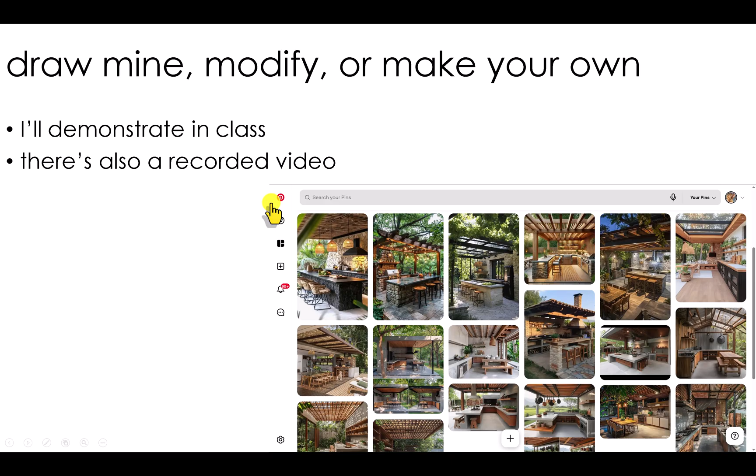There's a link to a Pinterest board here, and you can do your own internet searching. But the main features are some kind of outdoor kitchen, a trellis, all pretty much up against some kind of wall, existing wall of a house or otherwise. Of course, there's a recorded video, which is this.

Initially, right off the bat, one of the first things you'll want to think about is: is this going to be a fully photorealistically rendered model, or are you going to be trying to create a more artistic version? Because your precision level in the model will vary quite a bit.

High resolution photorealistic presentations, especially if there's some sort of walkthrough or VR piece, that's a very high bar to make.

However, if you're creating something more artistic like these two images here, black and white in particular takes out the color information. It's amazing how different an image can appear when you provide just black and white imagery and then perhaps some materials or suggestions for materials.

And same with an artistic sort of watercolor image. It's amazing how it suggests without getting too hung up on the detail.

So creating a new project begins by opening Revit. And one thing that I want to encourage people to do is use the default template. Other templates are kind of bloated. And what I mean by that is if you take a look at the new project menu, it doesn't usually have default in there.

But if you click browse, you can see all the templates, and there actually are quite a few, including metric, electrical, other sorts of things that you may need. But default is the one that we want. Let's use that and click OK.

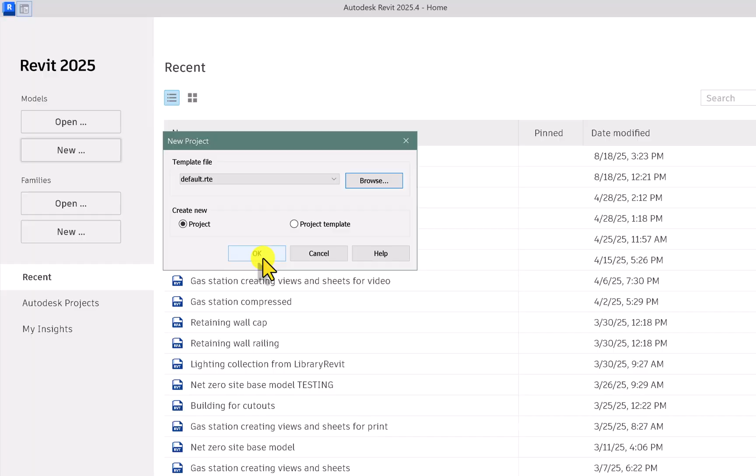That brings up the basic menu. And now we have to begin building stuff.

Now the question is, what's the best strategy for putting together a model like this? And it helps to understand how Revit models are put together and what each type of family in Revit is best at doing. And the most basic things in Revit are made of what are called system families.

These are walls, stairs, balusters, symbols, that sort of stuff. These are very nice, they're really efficient. However, they only have built-in options and they're difficult to customize. And typically they are placed on an active work plane.

So you have to understand that there are work planes, which are basically reference planes in Revit. However, each view has a default work plane. So if you're in floor plan view, the work plane is the floor plan level reference plane. And if you're, say, in elevation or reflected ceiling plan, there are work planes associated with those levels as well. So everything you draw will go into those planes.

And some objects only go on certain types of reference planes. So, for example, you can't put a wall sticking out from another wall. It has to go on a floor level reference plane.

So, anyway, those objects actually are nice because you can copy them to multiple levels. So I can draw a bunch of walls on the first floor and copy and paste them all onto other levels. And the biggest thing is that these are all parametric. You should understand the difference between instance parameters and type parameters.

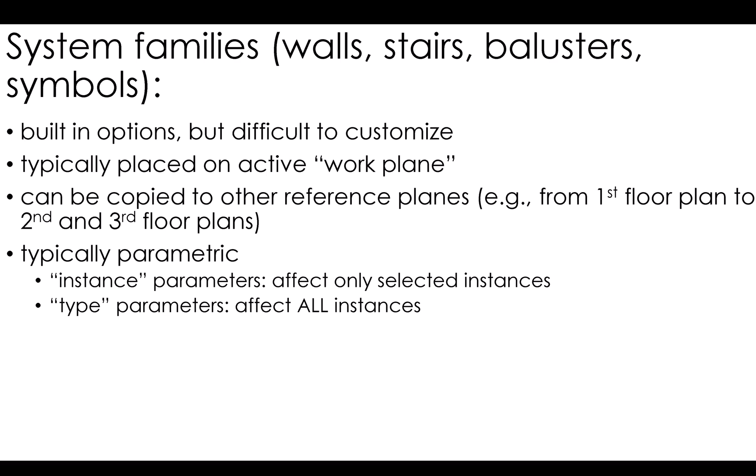Whereas instance parameters, like in a wall, a typical thing would be a dimension. How high is it? Where does it stop? And where does it start? So how high does it start on the ground level, or does it start on some other level?

So the next type of family are standalone components. These are probably the most typical sorts of objects you see in your models: doors and windows, all sorts of lighting and other furnishings. And these are great.

They are defined by the type of family, so when you're creating a new one, you have to choose in advance what it is. If it's, say, a ceiling mounted light fixture, it's going to have a light source in it, and it's going to be, you guessed it, ceiling mounted. So you do have to think through what the object is going to be.

These are drawn as separate files, so you can share them. People can steal them from your models, and they can also email them to you. You can go on the internet and find some.

These have special massing types particular to these sorts of families: extrusions, blends, sweeps, swept blends, and revolves. These are all rectilinear types of things, typical of most of the stuff we have in our built environment. And these can be solid objects or voids, which can cut other objects.

Sometimes you'll find nested components. An example is a door family might have a knob family inserted into it. So to edit the knob, you actually have to edit the door and then edit the knob itself.

Finally, most components will have parameters, and they are particular to the family. Things like materials are very common, and these can be instance or type parameters. It's kind of up to you.

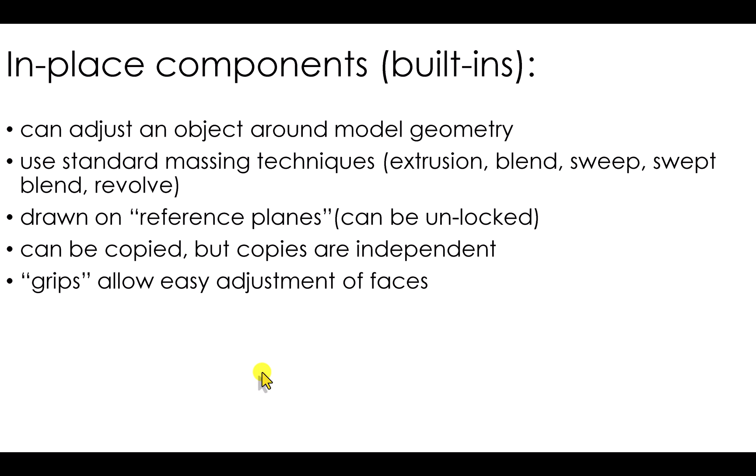So these are great for one-off items, things like a bookcase that has to fit into an unusual spot, or something that has to go around a column. Like other components, they use the standard massing techniques, and they're drawn on reference planes. Once they're drawn, they have handy-dandy grips, which are great for adjusting around elements in your model. So they're a little more flexible.

Are you looking for more flexibility? Well, in-place masses are actually great for non-rectilinear shapes. I'm thinking shades for lamps, something like that. So they don't have any of these standard massing tools.

Instead, you draw a profile on whatever surface you have chosen as your work plane, and then you can extrude that, and you can edit points and lines and planes on that object to create even more complex shapes, and they can be cut with voids, just like the other objects. So really handy for unusual shapes.

If you're not having enough unusual shapes, in particular if you're creating a whole new building, conceptual masses are the way to go. These are very efficient for modeling, say, a multi-story building that has an unusual shape. And the reason is that surfaces in these conceptual masses can be easily converted into things like walls, roofs. Even multi-level buildings can have all the floors created that take the shape of that multi-level building.

Pretty powerful stuff. And there's other elements like adaptive components that can create structural grids or something like that. Really great, but also quite complicated.

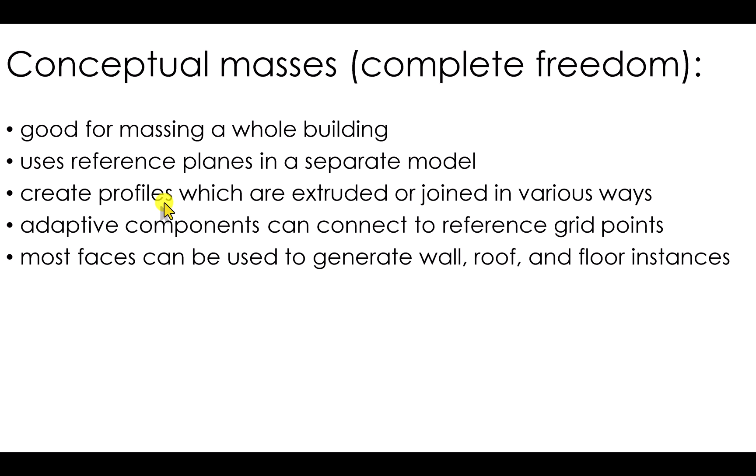Now, finally, the one type of object that Revit doesn't create that you often will use are imported objects. SketchUp or DWG, AutoCAD file formats, is in particular a great translation file format that you get objects made in Blender or other 3D modelers that go through that file format. Revit handles those very nicely, and boy, that saves a lot of time. That 3D warehouse is super handy for objects.

Finally, materials and lighting. Now, we can do all that in Revit. However, for optimal results, we use a rendering engine. And in particular, if you have to deal with landscape, landforms, or trees and plants, there are rendering programs. We will be using Lumion, and that is where we will create materials and lighting.

Now, you still need to create surfaces that have unique materials on them in Revit. This may involve creating split faces on surfaces, or just creating separate objects with different materials. Because the default material in Lumion, if anything is painted, that default material will change. So things like balusters, you want control of those objects.

Well, when you start a new project, the best thing to do is to not jump into Revit, but to think about first what you're going to do.

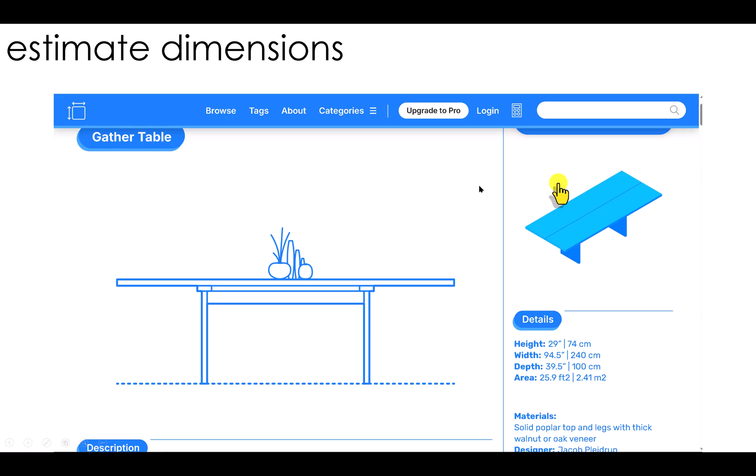The other thing that you'll want to do is really get a sense of what the dimension of things are. In fact, there's a website called dimensions.com, which is like a great name. And it has a lot of typical objects that you can go and look up. I looked up a gather table kind of thing, just to get a sense of how big that is. That's really helpful to check these things before heading into the model, rather than throw something in and see what happens. Now, sometimes you have to do that.

I would also strongly recommend making some kind of sketch. I just kind of sketched out what I thought I was seeing in this model, that there's probably some walls of an existing building. Looked like they were having those walls around the counter area. There was a table. There were some changes in materials, some planting. Having that allows me to roughly estimate how big this space is, again, based on dimensions.com's measurements. And that gives me a place to start with my modeling.

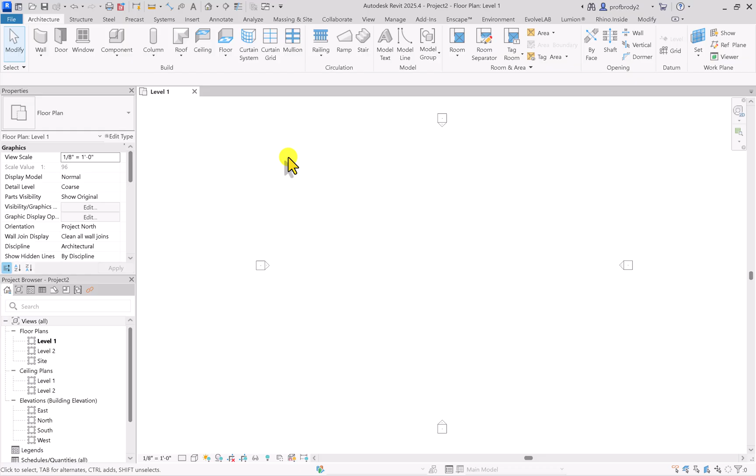So let's get to it. Let's get modeling. So the place to start is on the ground. Let's make a site. We can absolutely use Revit's TopoSolid features here on the massing site. These are great and very powerful tools for creating three-dimensional slopes. However, our site, if you take a look at the image, is really pretty flat.

So if we take a look here down at the ground, it looks like it's got some wood paving and some stones. So we don't really need all that complex. I'm just going to use a floor. And if you remember, floors are a sketched object. You can just draw them. I would draw them in the middle of these exterior elevation symbols. You don't have to, but it's handy.

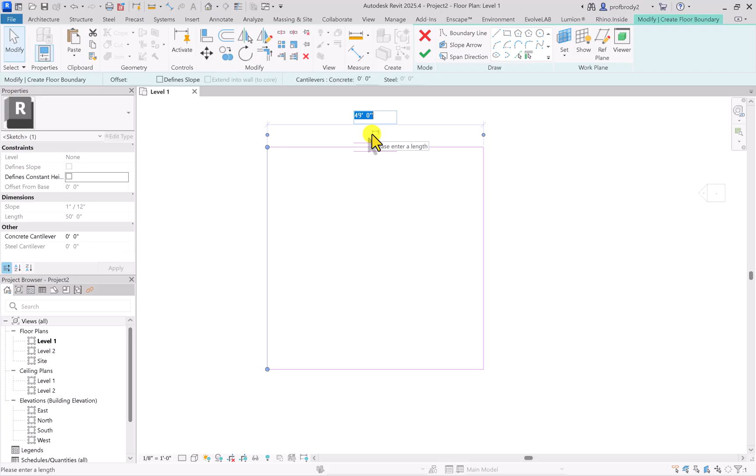Wow, that was hard, right? And here's my floor. It's very exciting to look at. It's a generic floor. Now, if I was going to be using this as an actual site where I would be cutting sections through it and all that, I might give some more thought, maybe make it the thickness of some paving and put a topo solid underneath it. But for us, we're just going for a rendering at this point. So a generic 12-inch floor is fine.

Now, if you remember my plan sketch, there were a couple of flooring materials. There's a main area that has some gravel on it, and then there's a couple of walkways. And so let's draw those in. But we don't need to draw a separate object. All we need to do is split the surface of this floor.

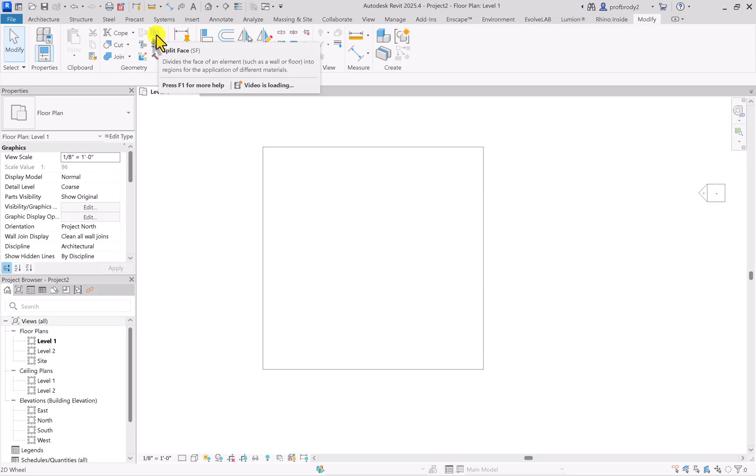To do that, you basically just go to the Modify tab that's up here on the ribbon, and you'll see that there is the split face tool. If you select the floor, by the way, the modify ribbon comes up all on its own.

Invariably, what happens when you get a couple of minutes into your project is you get this save the project button. Absolutely do that. Don't wait until the end of the day, because if your computer crashes, if something goes wrong, you will have lost everything.

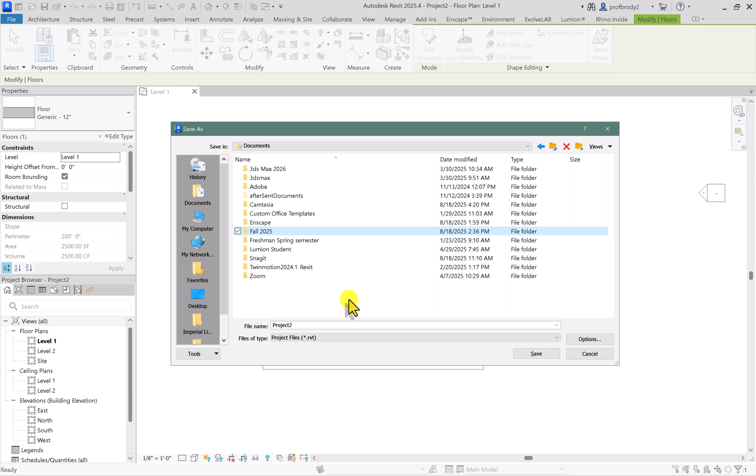In this case, you can save the project and it will save it periodically. You can even set reminders to save the backup, which it will save onto your file and keep updated for you. I cannot emphasize enough that you have to save this where it will get backed up. So I have a folder for this semester, for this class, and even for this project, and save it into there, give it a name that you'll remember so you can be assured you don't lose your data. When you do this, every time you save it, if it's something like Dropbox or similar, it will automatically save it.

Okay, so we were splitting faces. Let's click on the split face tool, click on the edge of the floor, and now we can just sketch in the lines of the floor separation. I'm going to try to draw it roughly in the middle, and I think I figured out that it's roughly 16 feet.

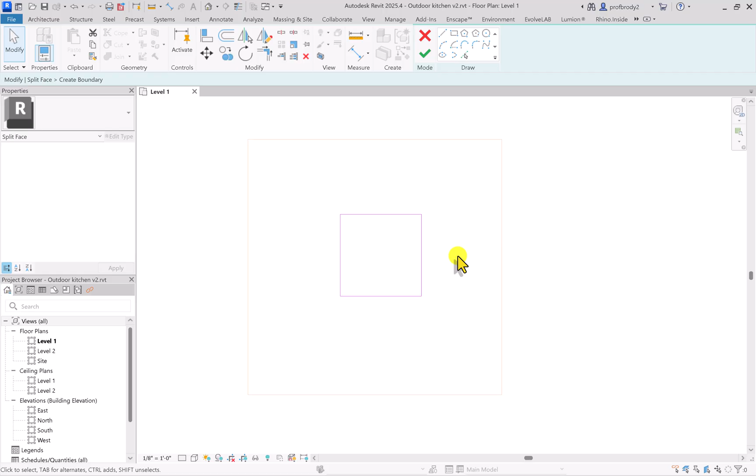You can nudge that puppy around just to select it and move it with your cursor, or you can hit the left and right arrows and up and down arrows to move it around. It doesn't have to be in the middle, we're basically using this as a reference site, so not a big deal. If I remember, there was a walkway off to one side and a walkway off to the other side. So right now we have this center section and this outer section.

To create these other pieces, go back into split face, again click on the edge. You'll see these light orange lines now appearing. When you draw them, I recommend drawing them one at a time. I have one that I want to go all the way to the end of my face. All I have to do is draw this one line. I don't want to overlap any lines, and I do want to make sure that it meets this outside wall.

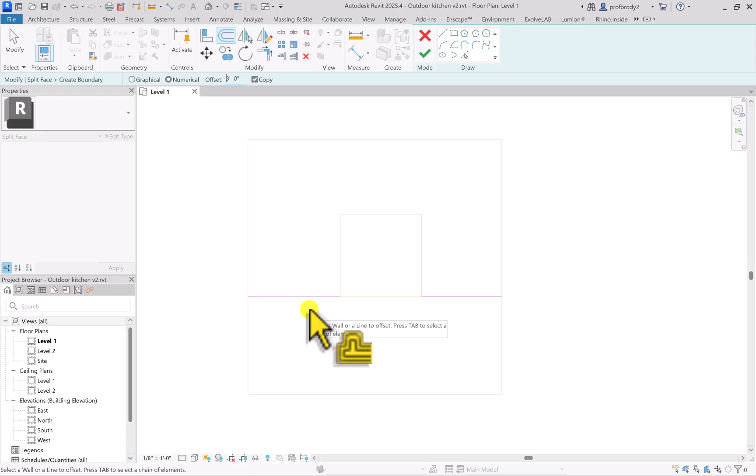If I want it to be, say, 3 feet wide, I can use an offset value here. I can just use the offset tool. And now when I draw that line, it's exactly 3 feet apart, which seems fine for a garden path.

One thing to be careful of: if I have more than one line - I want another path going this way, but I believe the direction of the wood goes the opposite direction from the path. So I'm going to do that as a separate split face. I'll clear this one by clicking check. Now I have 2 areas, and I'll draw that one last split face.

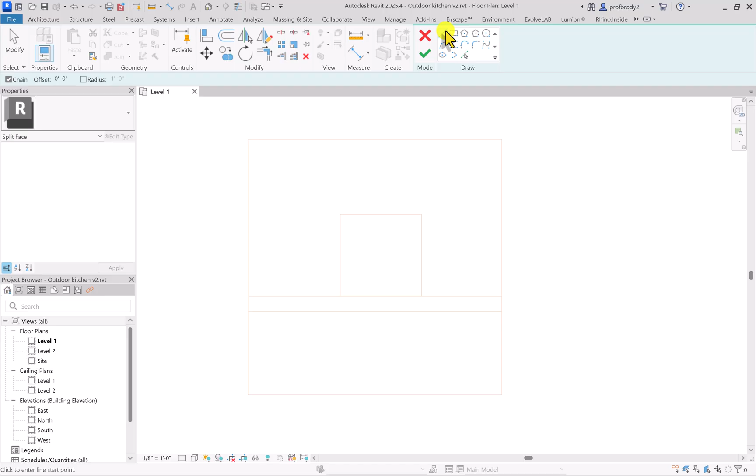Don't try to draw them all at once, because Revit really hates that. Or don't try to draw them as a rectangle - again, these overlapping lines will throw an error message. So I'll just delete that and draw those as a single line here. And there you have the rough outline of our site.

So I'm going to want to create something, even if it's just a placeholder material in the model. Let's call up the materials library. Shift M should bring it up, or you can browse to the Manage tab, but Shift M seems to do the trick pretty well. In the materials library, remember you can view these things in different ways, by name, get a thumbnail, you can even make a nice big thumbnail. So I've created some for the gravel and the fieldstone.

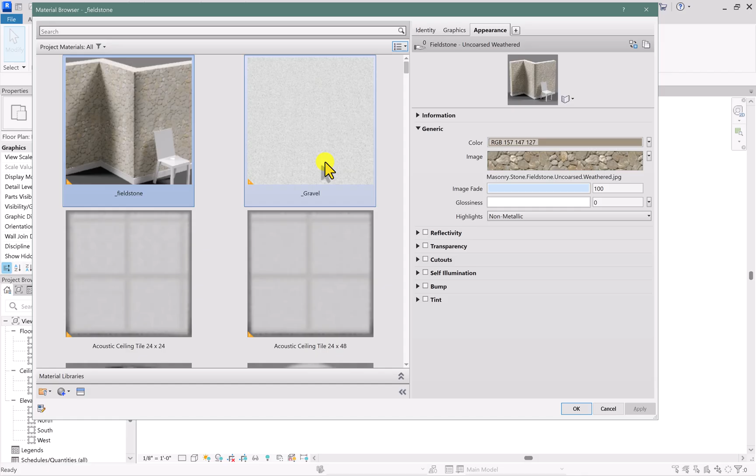Let's create one for the ground material for the flooring, and I'll choose create new material. As a reminder, name these something you'll remember what they are - I can't tell you how many people have like 12 default materials in their project. I use an underscore, but you can use your initials, anything to just help you remember.

I'll just call it decking, and you can choose the class. This is handy later on, but most of us are usually in a rush, so let's choose wood just to be efficient.

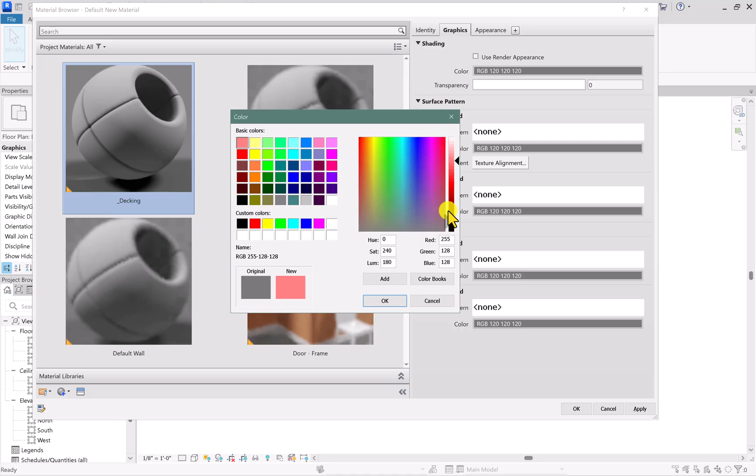Usually I use the render appearance, which makes the shaded view about the same as whatever the render appearance is. But in this case, I'm using a different appearance because I have two very similar materials that are the same except one is rotated 90 degrees from the other. So in the shaded view I want to make sure I've got them painted right. I'll click OK and use this color instead of the appearance.

Then in the render appearance, I'll use the render library. You can stretch this out so we can see the image a little better, which is helpful if your eyes are bad or you're using a tiny laptop. Then we can replace the asset, which is the base material used for this material, the base image. Be sure to use the Autodesk Materials Appearance Library.

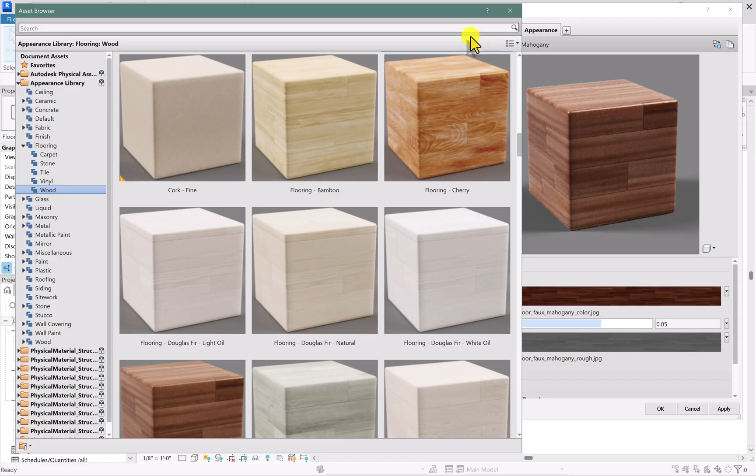I'm under the appearance library, under flooring, under wood. You could also type in the search. I'm just going to use this mahogany. I'll click apply this asset, close this library. Now we have this lovely material. I hit apply and OK.

I should be able to apply all of these materials by just typing in PT for paint. And the decking, which I believe is going horizontal, should go here. Now if I make this shaded view, I'll see that bright color I mentioned before.

I'll use the gravel for this gravel area. I believe there's some grass in here, so I'll paint pretty much everything else grass. Then this last little piece, I need a new material.

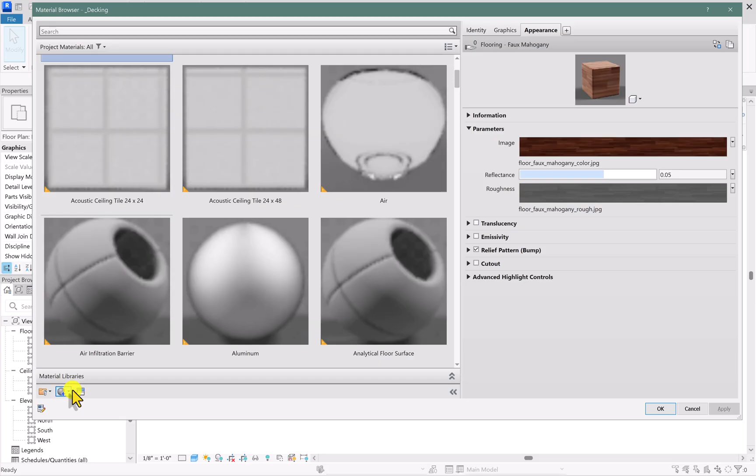Let's go back to our materials library and call up that decking material, and I'm going to duplicate that material and the assets. This is very important, because if you look up here, the duplicate material, I'll just call this decking at 90 degrees, or something like that.

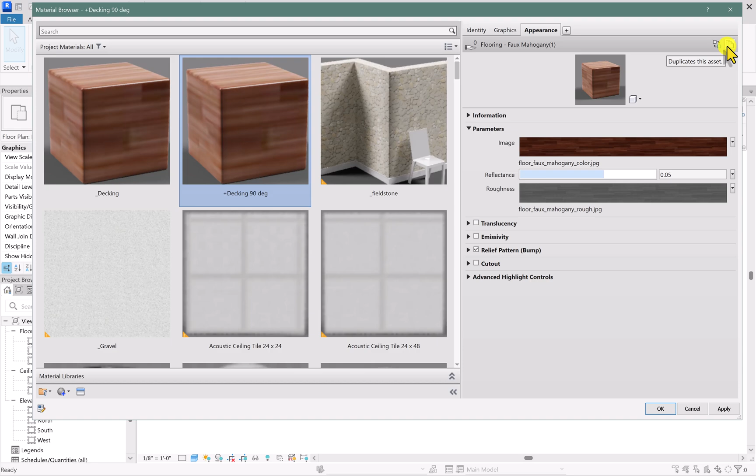I'm going to make the graphics something different, maybe green, so it's easy to recognize. You see the image here is mahogany, but it's mahogany number 1. If I were to go and change it and I didn't duplicate the assets, these would both change. So you have to make sure to duplicate the assets, and if you forget, there's a duplicate asset button to fix this very problem.

Now to rotate the image, just click on the image here. You'll bring up the image editor, and you can come in and type in some value for the rotation. Let's try 90 degrees since that's the value we want, and apply. You should see in the preview that the flooring is going the opposite way. Click OK. And now when I paint, I should have flooring that's going the opposite way.

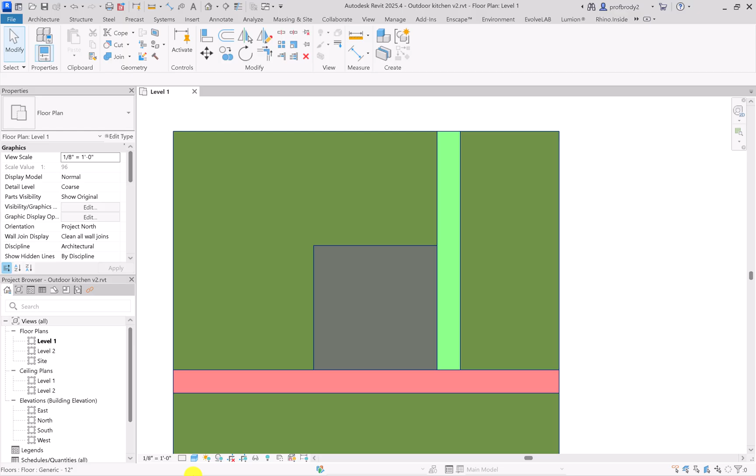There we go. See how easy it is to tell in this shaded view. If I hadn't changed those shaded colors, it would be a little tricky. Of course, I can always go down here to realistic view and give it a minute, and now I'll see how the materials are showing up.

But I don't like to run Revit using the realistic materials all the time, and the reason is it just slows down your computer. You may or may not be able to hear, but my fan is going bananas and the computer is getting really hot. So by all means, stick to shaded view in Revit. This is particularly true if you happen to have Revit and Lumion open at the same time—you want to be careful with your system resources.

Okay, let's add some walls. Like I mentioned, you can basically make your way down the toolbar here and create your project. Walls are one of the fundamental elements. One of the big things you'll want to do is choose walls based on the rough sense of how things are put together.

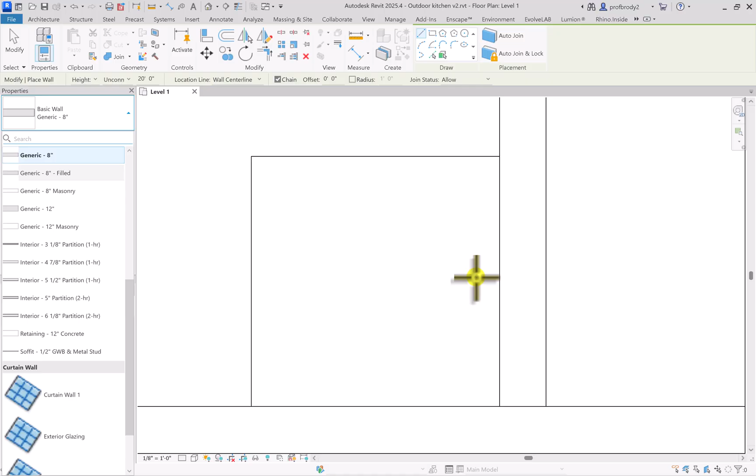For example, I believe there's a house back in here, and we're going to make our trellis supported on 4 pillars, and I think I'll use walls for those too. A generic 6-inch wall is probably fine for the house. When you create a wall, I'll just create it using lines here—you'll see it creates very nice graphics. I'm not going to draw the whole house because I don't really need to do that, and I can use the align tool.

I'll select the wall and hit align, then align this wall with that reference point. I could even lock it into position. But you do have to be careful - if you lock it and then start changing your mind, watch what happens to the floor. The floor outline actually moves as well. So we don't want to do that.

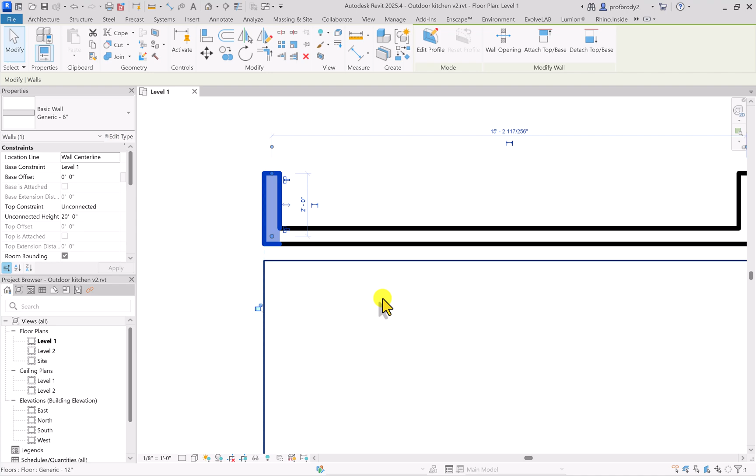I'm going to click that and unlock it. And then for this one, again, I'll use the same align technique - the aligner and the align. Maybe I'll leave a little bit of space between the two, just so that they're structurally independent.

Then for the walls that I'm going to use as the posts, I could draw these as in-place components or whatever, but walls are awfully simple for doing this. I'll select the wall tool, but I want a masonry wall, and I want it pretty thick, maybe 16 inches. Well, we don't have one, so I'm going to take this generic one and make my own.

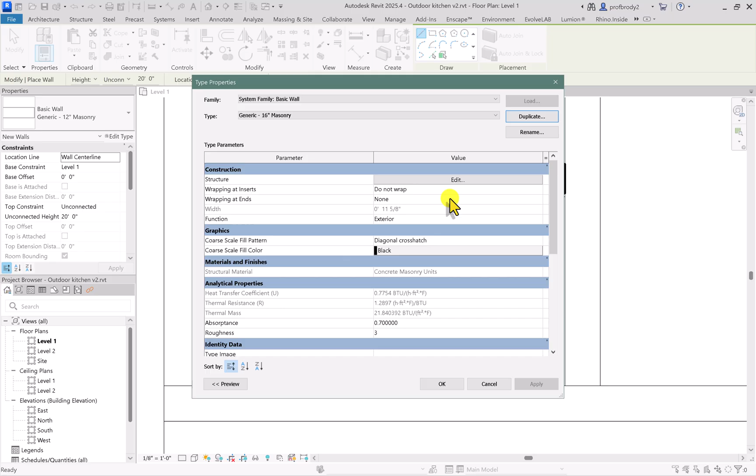So choose Edit Type. Here are the type parameters in this family, this 12-inch masonry one. I'm going to duplicate this and call it 16-inch masonry, because that's how big I want it to be. Now, changing the name does not change the material or the dimension. For that, you have to go to the Structure menu, and in here it shows the materials and the dimension. It's a funny dimension because that's the size of a concrete masonry unit.

I can just select it and type 16 inches, because this is a stone wall, so it's a little more freeform.

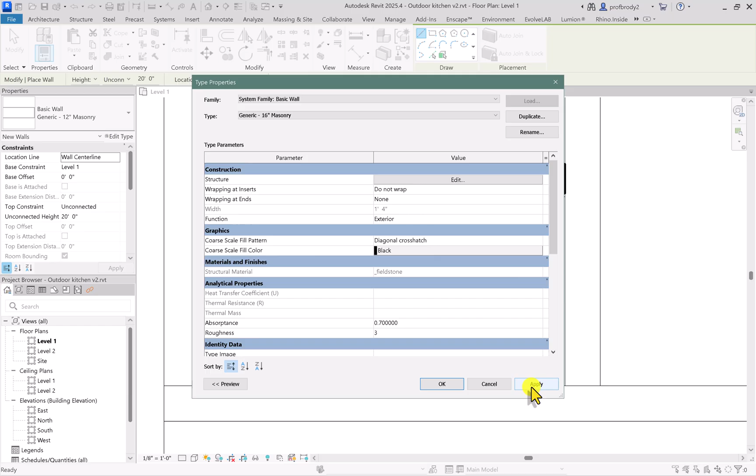And then I can select the material just by clicking in the box. When you click in the box, this little three dot menu shows up, and then your full materials menu shows up. In fact, you can even create new materials in this menu, which is actually kind of handy. But I'm just going to double click on that material to apply it and hit OK, then OK, apply, and OK one more time. Don't forget to hit it.

And then now I finally can just go and draw my wall. I'm going to start it a little bit away because I don't really know where it's going to land. I'll come down here and let's say we'll draw it about 2 feet. And if you're not sure how long it is, you can just select it and type in 2 feet 0, and it should shorten right up.

And then you can move it into position by clicking and dragging, or you can use the align tool. Just be careful again with that align tool - sometimes it moves the wrong line.

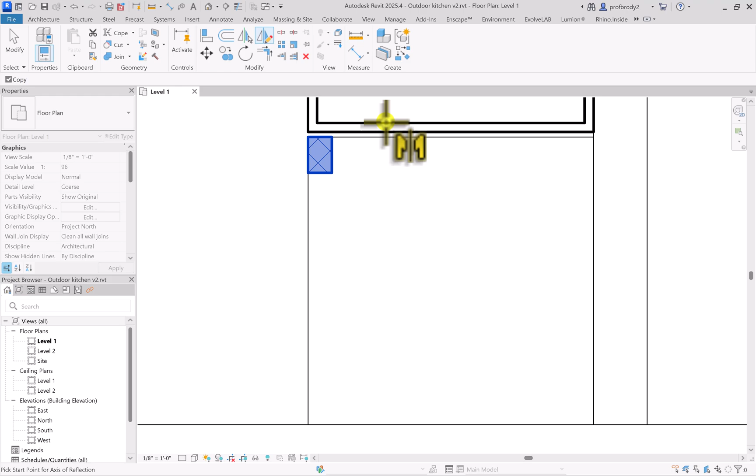And then to get the 4 posts, I could do this any number of ways, but I think I'm going to just use mirror to get them, just to make sure they're exactly the same. So choose mirror, draw axis, make sure that you have the copy button selected. This is just a real quick way - oops, did I get it? I guess I did, to make that copy.

Then using this modify tool, I can select these objects. You just have to remember to hold down Control to get both of those columns. And I'll use the same mirror trick here - it's all smoke and mirrors. And now I have myself my 4 posts.

So let's take a look at that guy in 3D. 3D, if you remember, is the default 3D view, this little house up at the top. And there you see it - I have a lovely little frame for my trellis.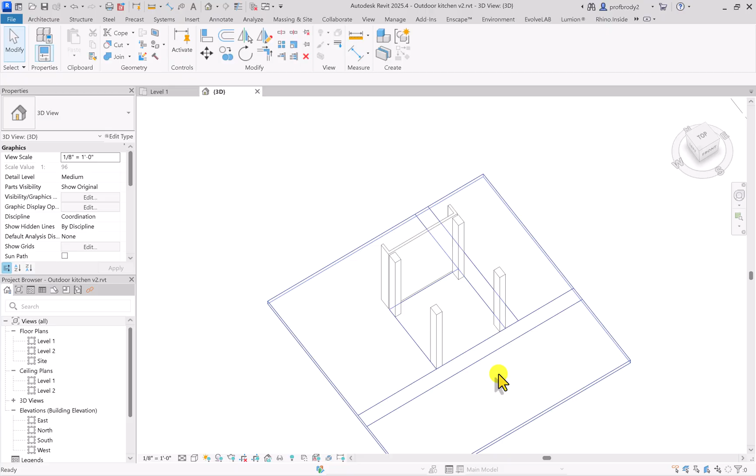The one thing is that we can change the height of these posts - they're kind of a little tall. That is, if you remember, an instance parameter. For type parameters, you have to edit the type - click the edit type button. But this instance parameter, assuming you have all the same family selected, if available, you can actually change it right here. In this case, it's the unconnected height. Let's go with, I don't know, 12 feet. Let's see what that looks like.

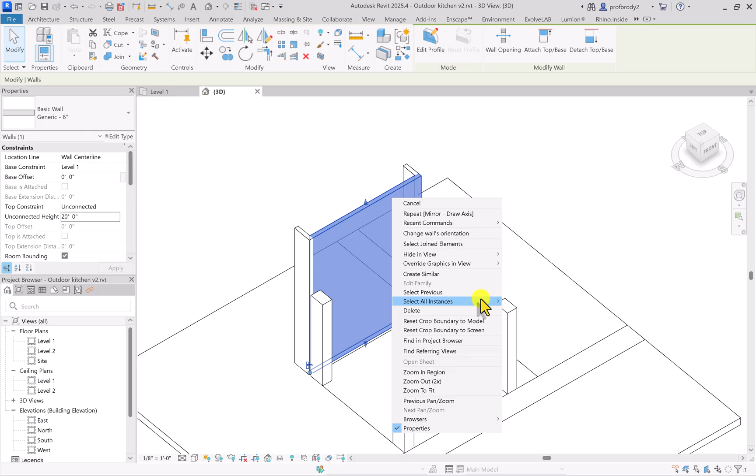With these guys, let's say I want to change the height of all of these walls, make them, I don't know, 18 feet. I can actually select all of these, select all instances, even in the entire project, of this wall type. See, they're both walls, but I'm not getting it - I'm not getting these other ones. I'm only getting these guys. And that's because they're only selecting all instances of that type.

Anyway, I can change the number here to say 18 feet. And of course, I'm not being super precise because I really can't see much of the building in the model, but already you can see the models coming together pretty well.

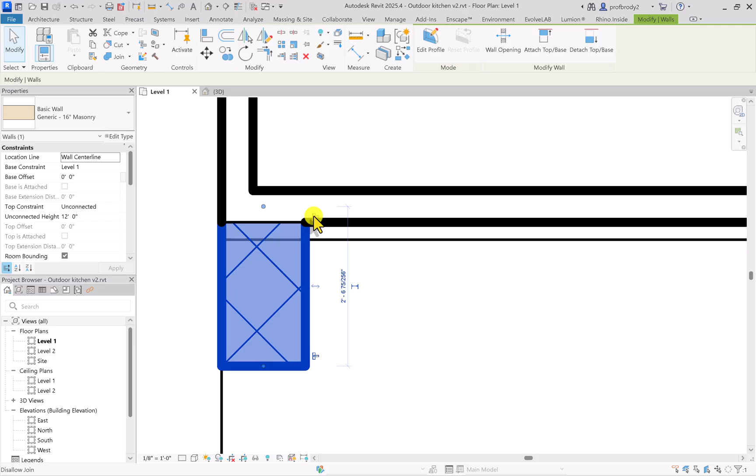A common problem is that Revit likes to join walls, and I just joined this pier. See how it's different than this one? There's no gap, but I do want a gap. If you look at your model, there's a little icon that disallows the join. Let me increase my scale so you can see what's going on. Now if I click that, you see the disallowed join button. What that does is unjoin those two walls, so now they're separate pieces. See how this has its own unique separate identity now, and I can drag it back up to where it should be. That's a really handy way to clean up those joins.

There are other wall joining tools up on the wall menu to let you attach or detach joints like that.

So let's go ahead and draw our frame for the trellis. To do that, we should probably draw it on top of these columns. Now, how do we make our work plane the top of the columns?

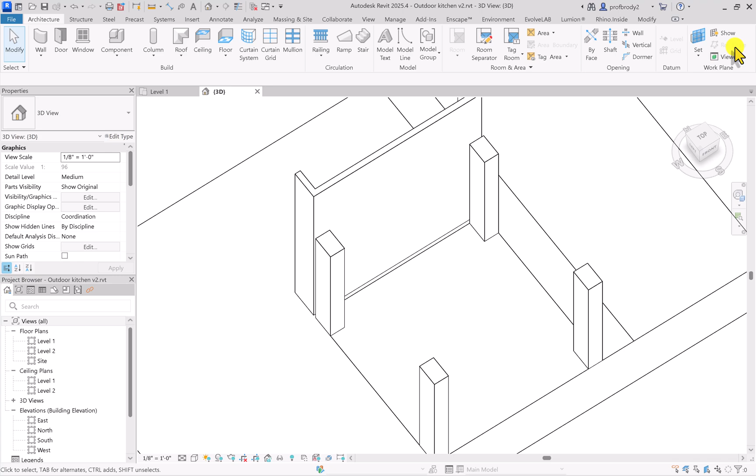Let's take a look here on the far right. It shows your work planes. I can click the show button, and you'll see it highlighted on the ground, that blue area. If I choose set work plane, there's a pick a plane button, and I'll move my mouse over the top of this. You see how it highlights these different reference planes. I could draw pretty much anywhere, but now when I click on the top of this, my work plane becomes the top of those columns. It's kind of annoying, though, so let me hide that again.

Then let's create a component in place, because component in place, remember, is what you need when you want to make reference to existing geometry.

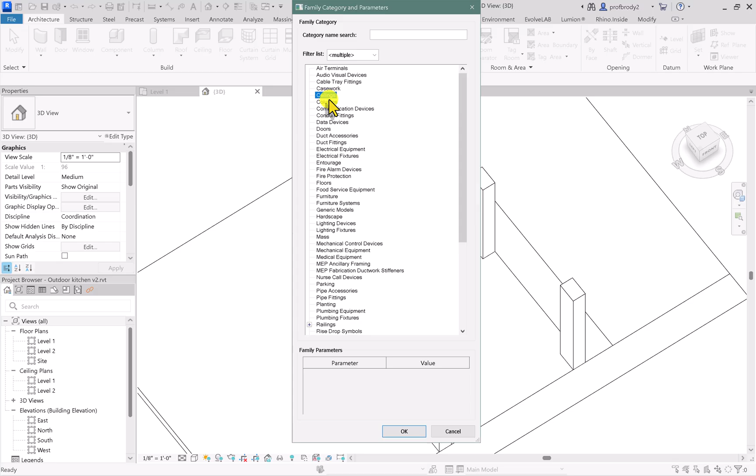In this menu, there are a lot of different family types in your model. A lot of people just use generic or furniture for everything, and that's fine. But one thing to consider is that if you're planning to put lighting onto this object, some ceiling-based light fixtures will only glue to ceilings. You probably don't want recessed lighting in this thing, but even surface-mounted lighting is sometimes very picky. So I'm going to create this as a ceiling family type.

Click OK, and we'll just call it trellis frame, I suppose that's the best name.

Now we're drawing inside the family, and you have all your options for solid types of objects or void types of objects. So an extrusion is what we'll need, and basically it's a rectangle.

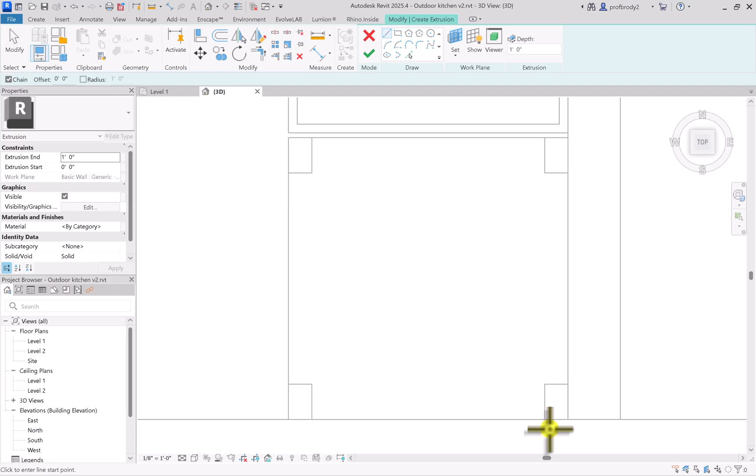I'm going to click on the top of my view cube. This view cube lets you quickly manipulate your drawing, and clicking the word top basically brings you into plan view, sort of. It's not a true plan, in that sometimes you can snap to objects three-dimensionally and it doesn't change your reference plane to ground, which is a floor plan. Anyway, let's click a rectangle, which makes it a lot easier to be sure I'm clicking the correct points. And there you go, I've got the outer frame of this trellis.

To get the inner frame, let's use the same rectangle tool, but give it an offset. I think maybe 1.5 inches is the right dimension, and since it needs to go inside, let's give it a negative 1.5 inches. I changed the sign because otherwise it would draw it on the outside. So that's the main part of the frame.

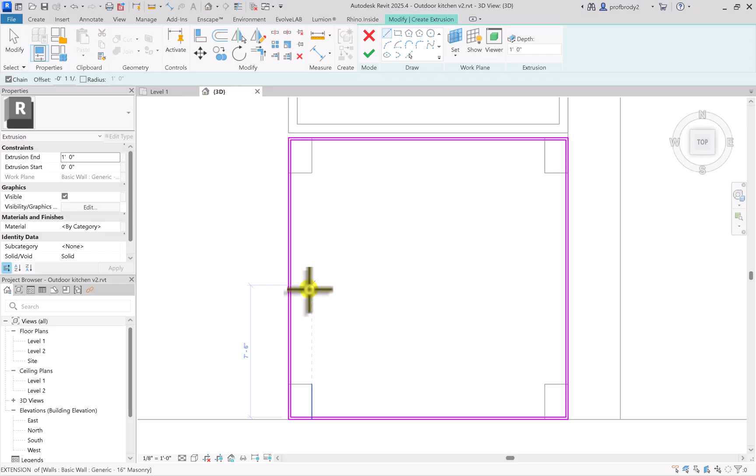And if I remember from the picture, there's a middle part of the frame. This is a little trickier. We need to draw a reference line first in the middle using the midpoint snap, straight across. Then let's offset that so we get a 1.5 inch dimension on either side, typing in 0.75 inches, or you could do 3/4 of an inch. I don't know which one's faster, but it doesn't really matter. You see how it gives you the dashed line indicating which side it's on.

Now, if yours is like mine, it's pretty muddy looking. Change the scale of your view to something a little more, maybe 1.5 inches is probably good. See how now I can see those lines.

That's much better. I can delete this middle line, and maybe I'll use the break tool to break this line in half and then trim out the result here so we get a nice even trim. And do the same on the opposite side.

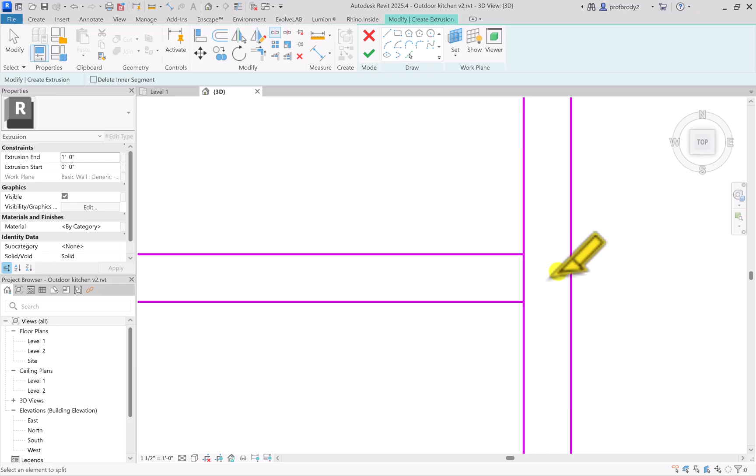Be aware, when you trim, it will trim based on where you click. So if I click the trim tool and click inside this wall, it will trim that way, and I don't want to do that. So let's trim the wall, but click on the outside where we want the end result to be.

Now, how thick is this extrusion? It's basically here in the menu. You can type in the value. I believe I said it was probably a 2x10, so 10 inches.

We can actually make this... well, let's just make it 10 because I think it may be metal. And apply. Now all you do is click check, and there you go.

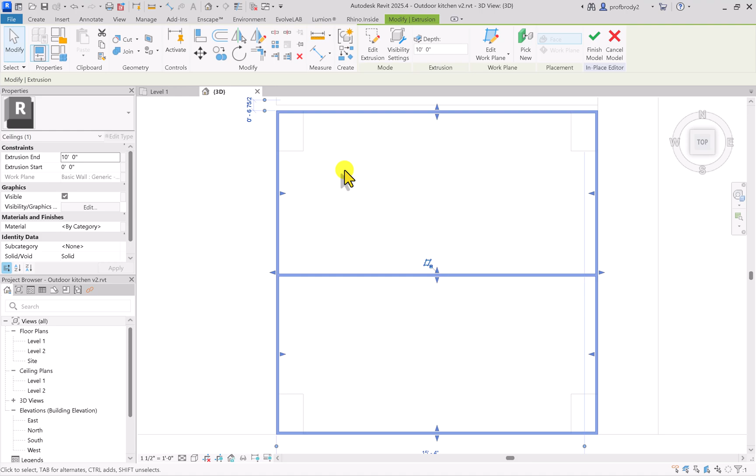You've made yourself an instant extrusion. How nice. Oh, except I think I typed in 10 feet, didn't I?

Let's go back, edit in place, and select the extrusion. Oh yes, I did - I typed in 10 feet instead of 10 inches. So there you go. That's the beauty of these in-place models.

They're very easy to edit. You can see here, if I change my mind, I can edit these using grips, dragging things up or down, left to right. So super flexible in that way.

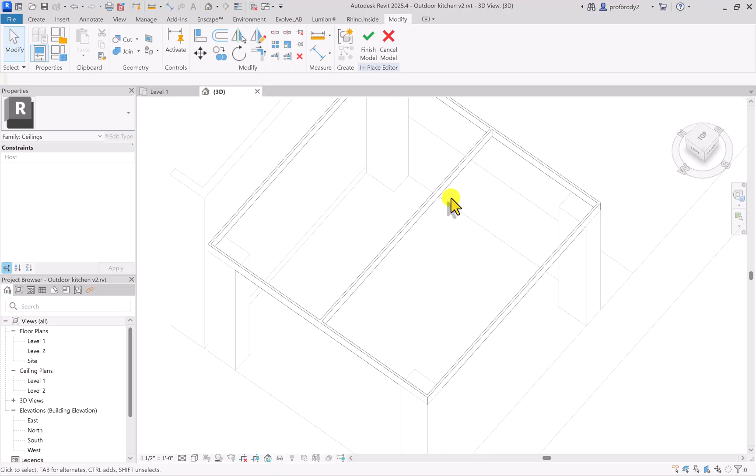Lastly, while we're editing the component - let me double click on it so I am back into it - let's add a material. Now we absolutely could come in, just click inside this menu and click the 3 dots to add a material. I think trellis slats is what I've created.

And that's just fine. So to edit the material, we will have to go back in and edit the family, but that's fine. We don't need further control than that.

Let's create the slats next. For those, well, clearly, if you look at the image, you can see they're repeated, right? So that sort of element is more typical of a component, a standalone component. So let's create a standalone component.

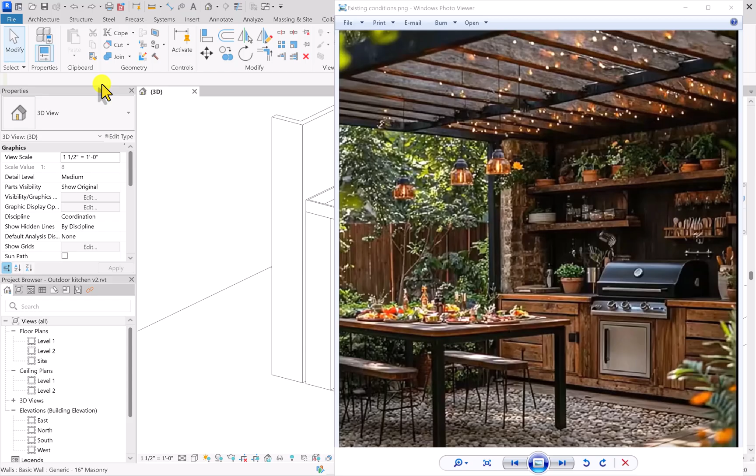When we do that, we'll go to the File menu, New, Family. So we're creating an entirely new standalone family. And you can see there are slightly different family options.

There's no ceiling in this case. So we could use either generic, or I think I'm just going to use furniture. It seems a little more realistic to me.

I'll create, click open. In this environment, you can see, first of all, it opens a couple of views. Now, I'll click on them. There's nothing there, right? I haven't drawn anything yet. And you can draw in any of these levels here, any of these reference levels.

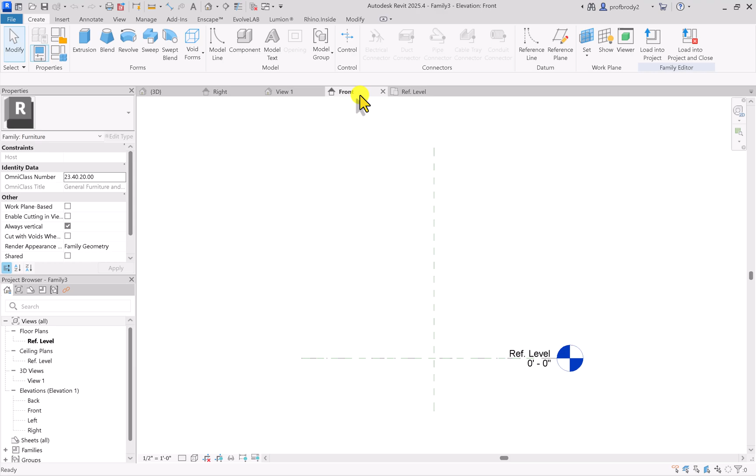So I absolutely could draw using this elevation view, but it's kind of big, so I'm going to draw on the ground. First of all, these dashed lines are reference planes, so we can draw our own, but I'm just going to use the ones that come with the family for now. There's the center.

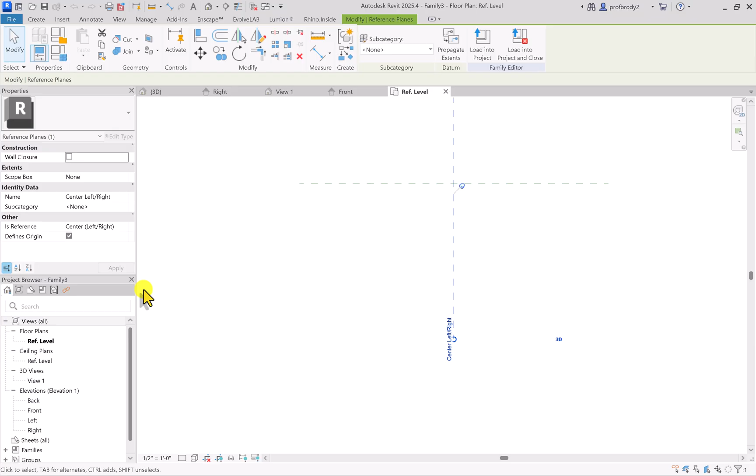Front slash back, and then this one here is the left to right. So given the orientation of our model, just to save us a step, I'm going to orient them this way, and I'm going to start them at the origin. Here, the origin is where the 2 reference planes that are drawn meet, and I'll choose create extrusion.

We've done this before, right? Create an extrusion. Let's give it a dimension. I think 5.5 inches is the actual dimension of a 2x6.

And then we'll draw lines here. I'll start at the home base there, and I'll draw it out. I can actually type in 16 feet, so I can save myself having to stretch it.

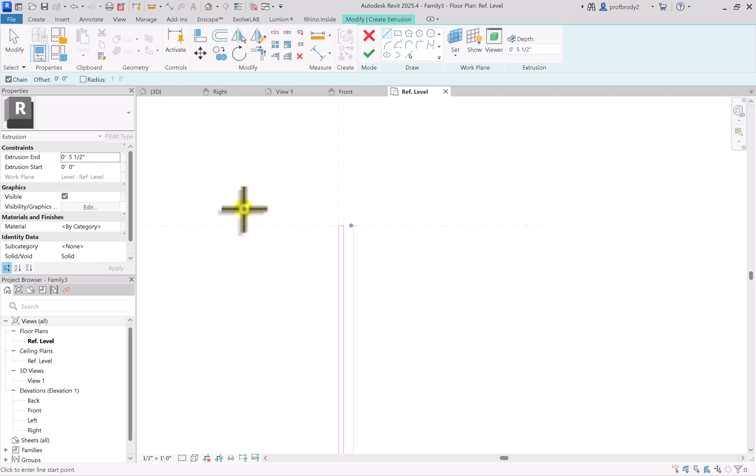And it's only 1.5 inches wide. The reason I'm typing them in is it's kind of narrow, so it does make it a little easier. So there we go - I've got my shape, and I'll click the checkbox to finish.

And you might say, well, what's that? Let's take a look at it. We can actually look at it in the 3D view here. And you can see it's a 2x6, not terribly exciting.

But let's go to the right view here, and you can see it's a 2x6 that's sitting on the ground. I'd love to move it up to the height that it is in the model. I could do that in the model, but I could do it here too. I absolutely could use these grips here to try and stretch it up, but better is to use this dissociate work plane toggle.

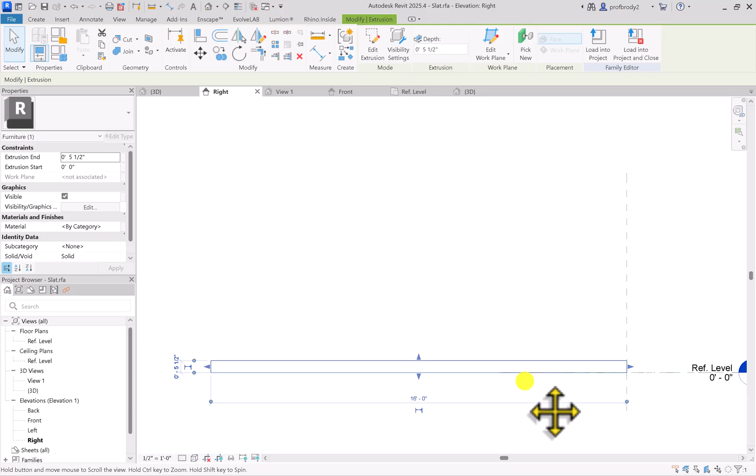So if I do that, now the object is no longer connected to the work plane that it was created on, and I can move it up to the height that it is in the main model. I believe the main model posts were 12 feet tall, and the frame was maybe 10 inches, so I'm going to move these up 12 feet, 5 inches. I believe that should be correct.

So then you want to save the model. I'll just save it into my project folder. And lastly, load it into the project. Now, it gives you the option to load into the project and close, but I'm just going to load it into the project, like so.

And you can see it wants me to place it somewhere. I'm going to place it right here on the ground. And I suppose that the placement technique is I could have left it on the ground and just moved it over. I don't know, six of one, half dozen of another.

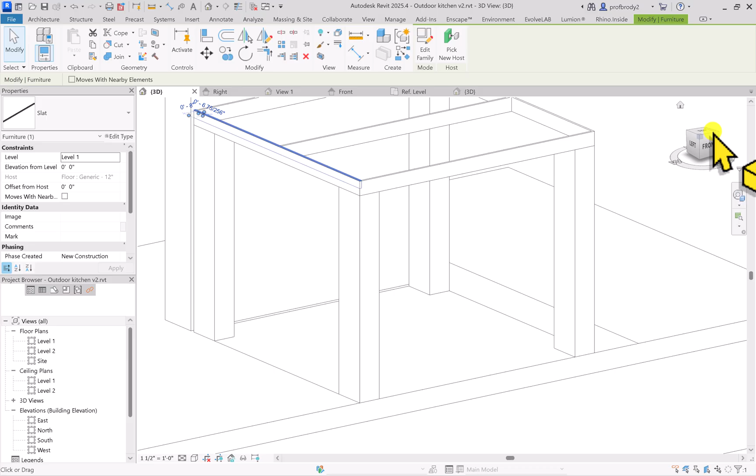So now let's put this up here in the top view and take a look. And I guess actually, if you look at the picture, this first slat doesn't occur until the inside of this frame, or at least that's what it appears. And I'm going to go with that.

Now, how do you make multiple copies of this gorgeous slat that I've created? Well, it's pretty straightforward. Let's just go to the top here. You can select it, and there is an array tool. The array tool creates linear or radial arrays. I'll let the little video play. Great for this sort of thing, and also for furniture.

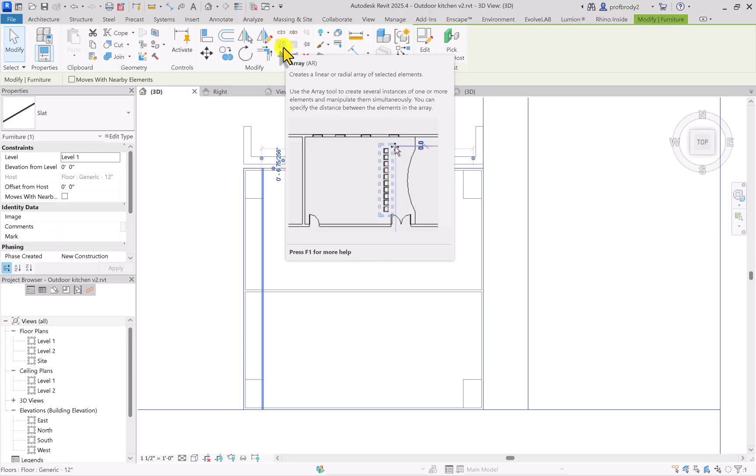And if you watch the video, it will basically make copies, and you can edit the array after the fact. You can specify distance. So I'm going to start by just making a copy, and it highlights after you make that copy, how many you want. I'm going to guess 6.

Try that. And then if you move any one of these, it will stretch the array out. Let's take a look at that. I think that looks pretty good. And so we want to move these slats down ever so slightly. Again, this is kind of the design process. I believe they're an inch too high.

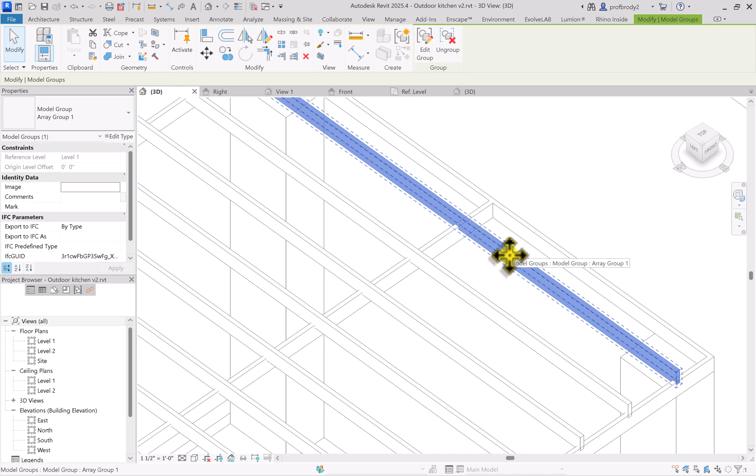So I'm just going to edit the group. When you create an array, it creates a group, so you just double click on it. You see how now I've got the slat again, and I can move it up or down just by changing the elevation that it was put in at. I'm going to just move it down 1 inch and apply, and you'll see that they all move down.

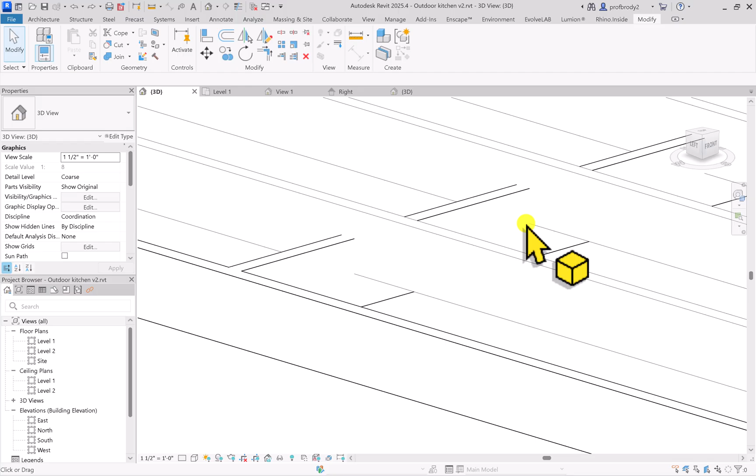One annoying thing about Revit, one of many, a long list, is the way it handles objects when they overlap rather than when they kind of fit together like puzzle pieces. You see here the slats are kind of overlapping the ribs here of the frame, and it just doesn't look right. I could absolutely make this a shaded view, but I don't really like to operate in shaded view if I can, partly it's just a little eye strain.

It will look fine in the rendering engine, but we can fix this by just cutting little notches here so that they do in fact fit together. And to do that, it's pretty straightforward. We've modeled this object as a solid. We can create a mass that's a void. So you go to the Create menu, Void Forms, Void Extrusion.

You just have to make sure that you either draw it in the right elevation view or left elevation view, or if you insist on drawing in the 3D view, let's just pick the work plane as one of these vertical planes so that we can draw right on it.

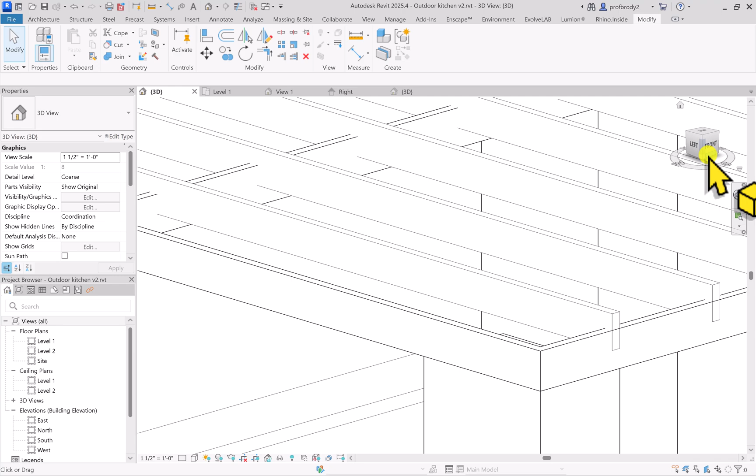And if you don't happen to remember the dimension of these slats and their overlap, we can just measure it right here. I'll just zoom in on the front of this, and there's a little measure tool, looks like a little tape measure. Let's see, looks like 3 inches.

And that's what I've drawn here, a little rectangle for my void. And often when you create a void, I'll just click the little checkbox, sometimes it goes the wrong way. Doesn't really matter if it goes all the way through or not. And when you click off of it, the void will take a bite out of your model.

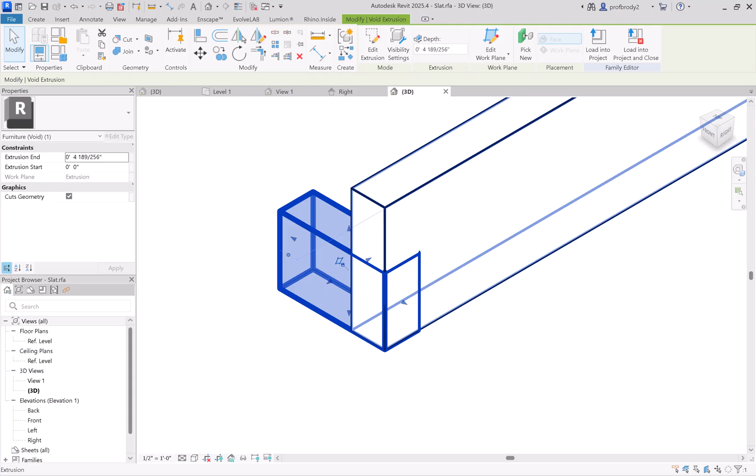And what's cool is you can create the void and copy it. This is easier done in elevation view just because sometimes things get out of whack in 3D. So I can copy this guy all the way down to the other end, and I believe that the one in the middle is the opposite one.

Now the only trick is selecting the void. You see how my cursor has trouble finding it. Sometimes you can hit tab and it'll cycle through what's selected. It's just that voids are invisible, so they're hard to see. You can also use solids and convert them to voids after the fact.

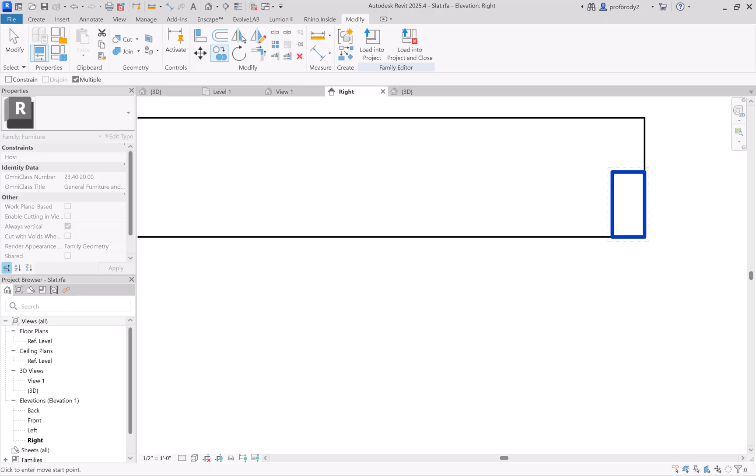So I'll just copy this down to the middle and we'll have our notches, which we can load into the project now that it's done and see if they fit. And they do. So any other things you want to add, any decorative filleting or that sort of thing, you can add into the family. And what's cool is you can see it right away and decide if you like the aesthetics of that element or not.

Lastly, let's add a parameter onto this object here. Right now it's just got the default material. It says by category, so whatever the default material for furniture is, that's what this is going to be for our furniture. I could just click in here and choose a material directly.

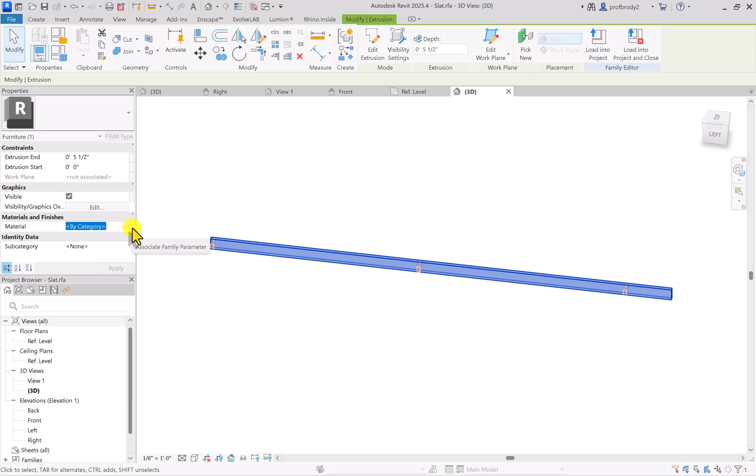However, I find it's a much better rule not to apply materials inside families, especially ones you know you're going to be editing. Instead, if you look very carefully, there's a tiny little box here that has nothing in it. That's the Associate Family Parameter button. Click on that, and now we can make a new parameter for this object.

I'll just click New Parameter - it's a good place for it. And we have this option for type and instance. Instance would be when you want different slats to have different materials. Now, of course, we want them all to be the same, so we'll just call it 'slat material' - very clever - and leave it as a type. Click OK. We don't actually have to assign any particular material to it yet.

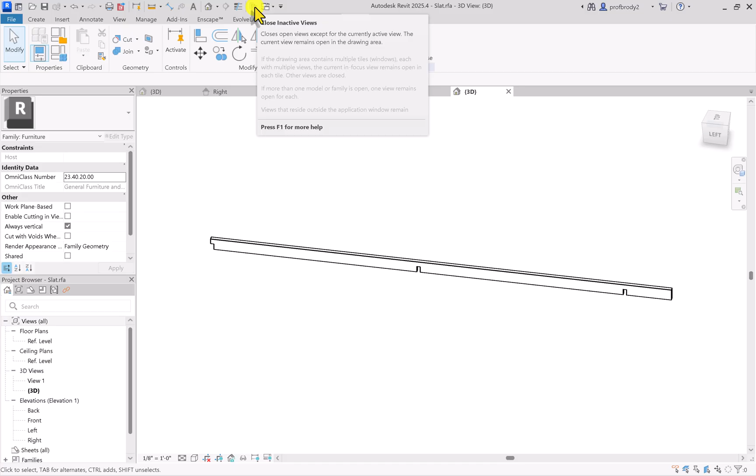Again, I'm going to save and load this into my project. In fact, I'm going to choose load and close because it'll close all these extra windows. And if you don't like a lot of windows, you can also use this close inactive views button - that gets rid of extra views too. I'm going to load this in, close, overwrite it, and I have actually changed a parameter now.

So let's double click on this object, select it so that we now have the family. And what you'll see when you choose edit type, there's the type parameter. I can just come in and assign a material like we've done several other times. Just try and find the material that you've created and remember what it is. Hopefully I've got one already created.

And you're good to go - you've finished the group, and they should all change color with any luck. Let's see if that really worked. And it did, there you go. Oh, but I think I had the frame wrong - so here's the frame with the black material instead.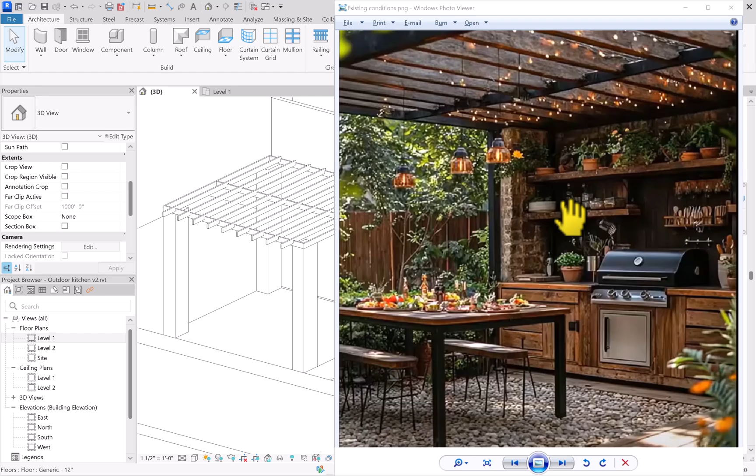I'm not going to go over how to create the model in-place components needed for the base cabinet and the shelves. However, there is one trick that'll make life easier when doing that sort of thing, and that is the section box. It's a view property.

So with nothing selected - it helps to click outside of the model - you come down in the view properties and should see a box for the section box. You just check that radio button, hit apply. Let's zoom out here. Where is that? Oh yeah, there it is.

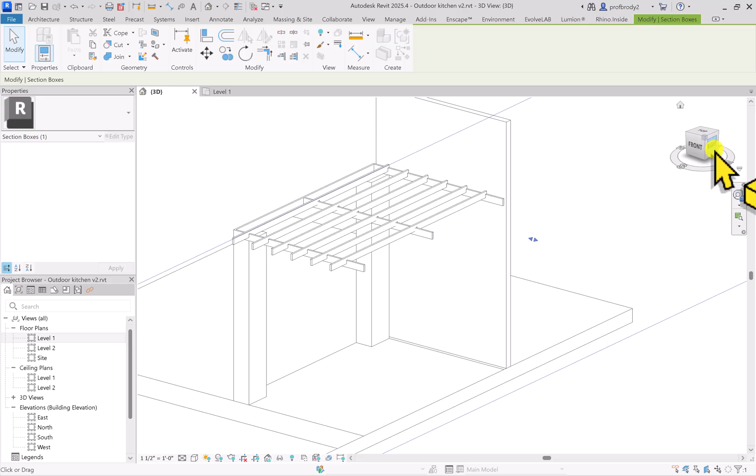This box has these little grabbers, these grips that you can use to drag the model forward or backward, up or down, so you can actually crop away the ground if you need to. And all the same view cube options apply. But now I can set this as my view, my reference plane, my work plane, and draw these extruded elements right here.

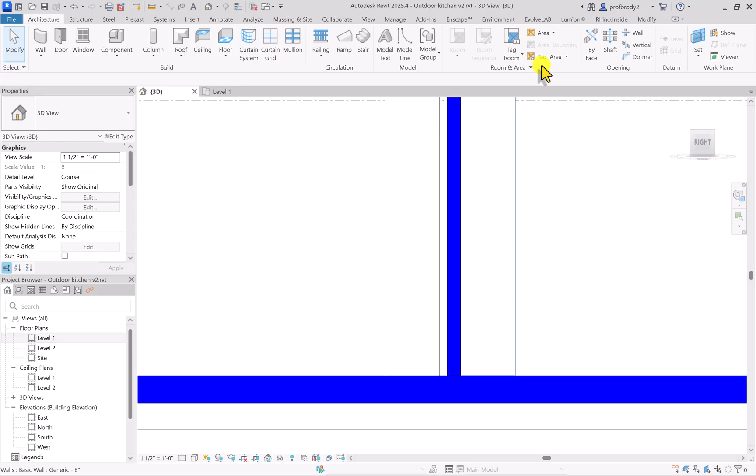It is, by the way, sometimes helpful when you're in this section mode to turn the view from a detail level of medium to a detail level of coarse. That shows you the color of anything that's cut through - it just defaults to overriding anything cut through to show that material. And frankly, it's just helpful when you're trying to figure out where you are in space. A quick change to the view properties makes it easier.

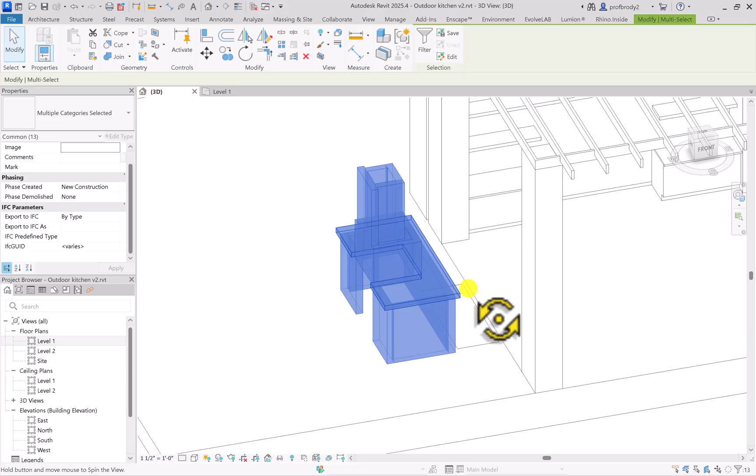I had the idea to put a pizza oven out in the backyard here, and it gives me a chance to show you a couple of tricks when you're working on an object. First of all, I'm making this out of walls because I want it to be hollow. I could absolutely make this out of masses, but then I'd have to do voids, and I want to avoid voiding too much.

The other thing is when you're working on an object like this, you can just isolate these objects, either the elements or the whole category. Now I have a mass in here, so I'm going to isolate just these elements and see how it hides the rest of the model. Obviously that's super handy for this sort of thing. When you're done, you can just click on the eyeglasses down here and reset this temporary hide isolate.

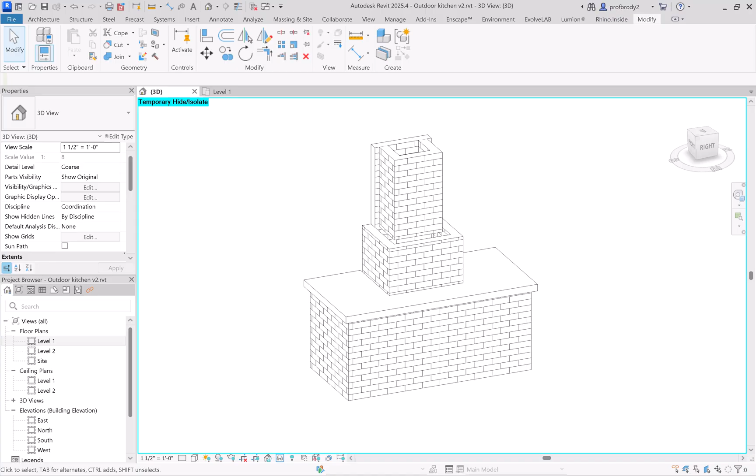Anyway, walls have a bunch of features that can make them interesting. First of all, I want to taper these walls a little bit, maybe so that they meet this outer wall. Again, this is something you could do more easily with masses, but walls have this feature where you can make them slanted. This is great if you're experimenting, trying to get a look you like, in this case a slanted chimney. I could go into the properties of the wall - you have to have it selected.

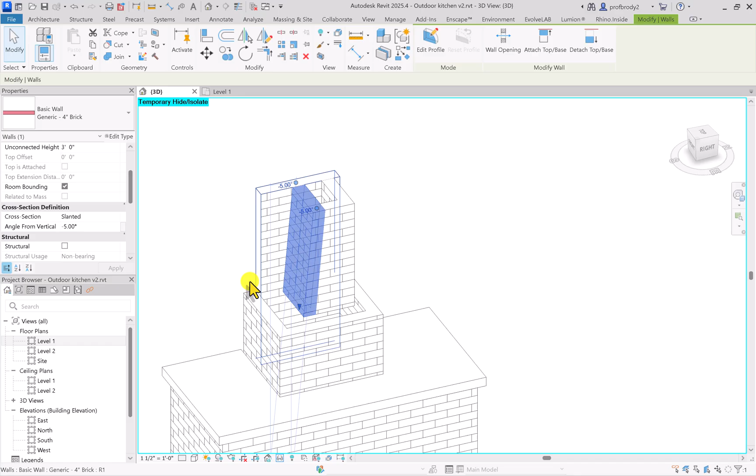Instead of a vertical wall, choose a slanted wall, and you can just apply an angle. I think I want it to go in, so it's going to be a negative number, -5 degrees. You see how it moves. Now if you look, it's actually got grips down here at the bottom, so you can change the wall like you normally would. You can also type in the number here if you want to change it, to 4 degrees or something, as you want to experiment. But it behaves like a wall, so you see how it joins the outer wall.

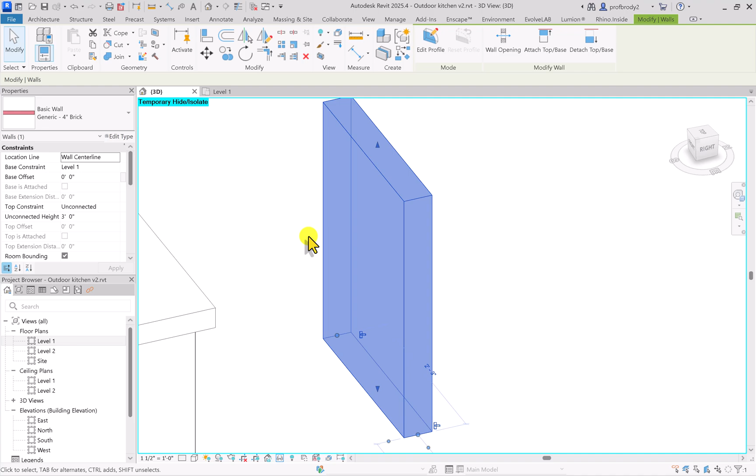And again, you can do that using masses, but it does save a step. The other option here - let me undo back so it's not slanted anymore - is you can make the wall tapered. This has other applications, maybe not here in this model, but tapered walls are actually handy in landscape applications. They're pretty easy, but you need to edit the wall type and go into the structure of the wall and make the thickness variable. Why that doesn't just show up as an automatic thing, I don't know, but it doesn't.

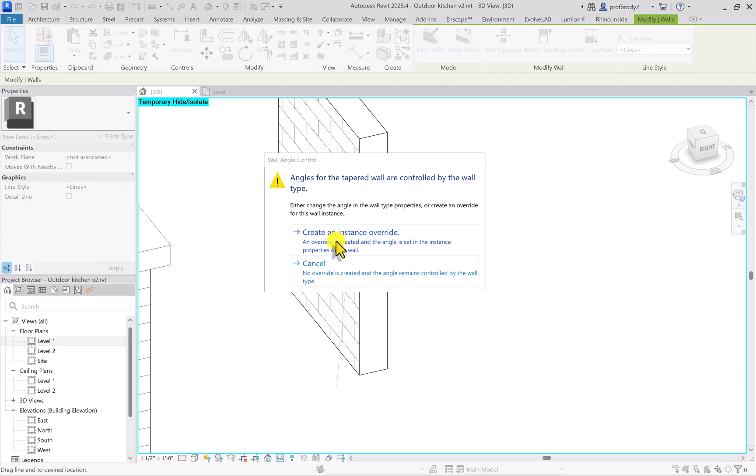Once you do all that, you can come in, select the wall, and it will allow you to change it to a tapered wall. Tapered walls, like the slanted ones, I could type in the values up here, or I could literally just grab the grips and, in this case, create an instance override, which allows me to change this instance. And the tapering can actually be irregular. If it's a landscape wall, sometimes they're vertical on one face, or sometimes you can do something opposite, for example tapering in or tapering slanting back.

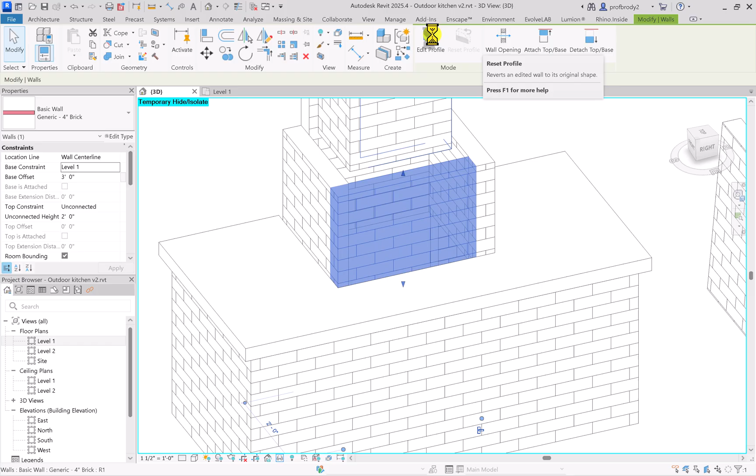So a lot of fun options here in walls. Lastly, if you want to create an opening in a wall - say the pizza oven opening shape - there's a number of ways. There's a wall opening, but these are rectangular, so they don't have quite as many uses. Editing the profile is the way to go if you want to do something like this, and it's very similar to split face. You get the outline of the wall, which can be changed to work around other built-in elements like slanted walls.

And then I can draw a shape on here. I don't know exactly what shape a pizza oven is like, but I believe it has kind of an arc - again, we're just experimenting. The advantage of this is it works like split face, but now I've actually cut a hole in the pizza oven. Well, I didn't really like that pizza oven all that much that I created.

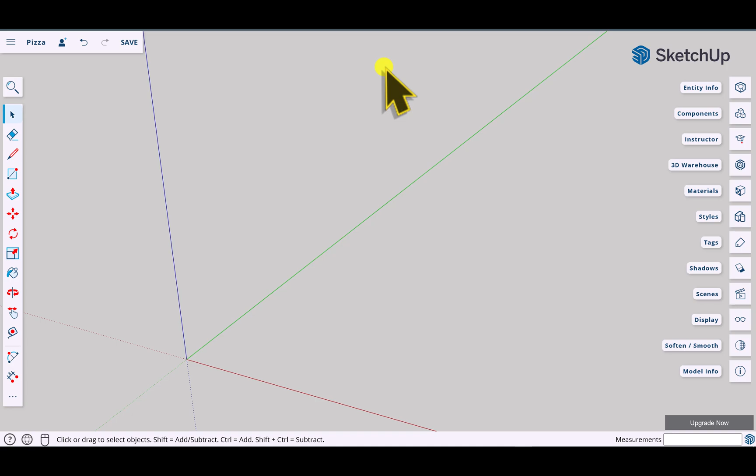So I'm going to go to good old SketchUp, which has a free online web version. You just need to sign up for it and use the 3D warehouse, which, if you're not familiar, is a vast library of objects. You can just type in what you want, say a pizza oven, search for it, and you'll find so many models - you can scroll through and have a great range of choices.

And I found one here that I loaded into my model. It's not too many polygons, and the advantage of SketchUp is that you can see it has a lot of detail that would be pretty tedious to do in Revit.

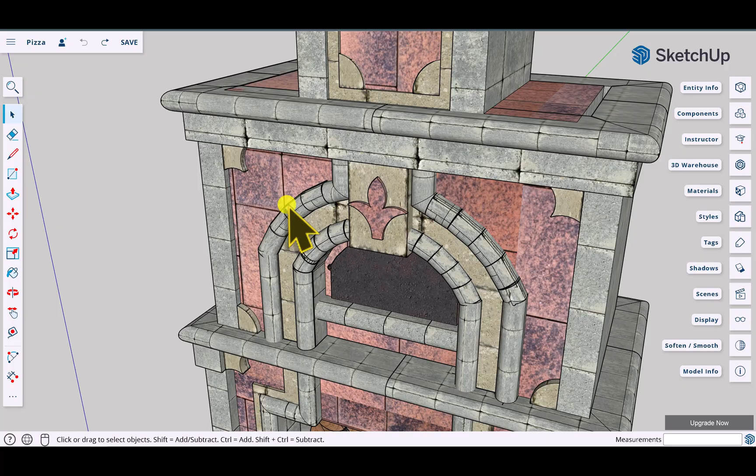And the only trick to get it to render properly, because we're using Lumion - Lumion can kind of see all of these materials, or at least the colors - we don't need to do anything other than make sure what we want painted has paint on it. But then you save your model and you can download the SKP file, and that's what you need to load into Revit.

Okay, so back in Revit, you can load that model into your project. Just go to the Insert menu, and you can either link it or totally import it. I like to link it just because, I don't know, sometimes I change my mind or need to edit it for one reason or another.

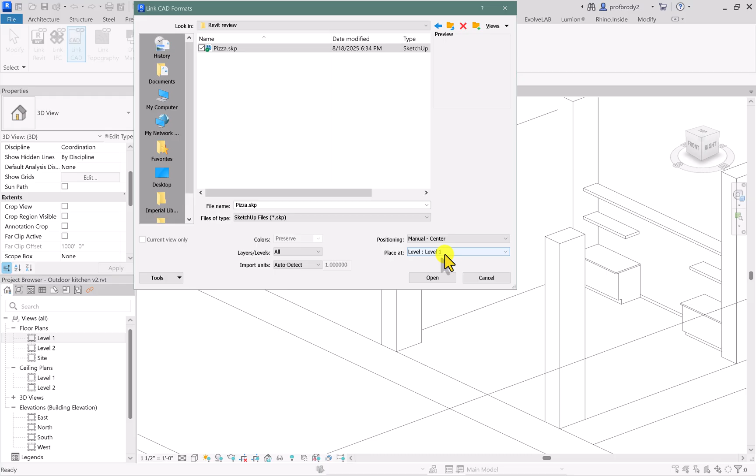Make sure that you're searching for SketchUp files, so choose that as your file option. There it is. And one thing you'll want to try is, instead of auto origin to internal origin, do manual and center, then make sure you put it on level 1. This makes it a little easier to place. Sometimes when you import these models, they go off into outer space, and it takes forever to find them. But now it just comes in glued to my cursor.

And you can see I did get an error message, so maybe some of the geometry wasn't right. Revit is kind of picky about the kinds of geometry that it accepts. But this way, I can place the object, and if I absolutely need to, I can modify it. Oh, I guess I'm in the wrong work plane here, so let's rotate this.

But you can see that the object is coming in pretty good, and it appears to have all the detail that I'm expecting. Let's take a look at the colors and textures. The textures are largely lost, but there are materials of some sort on there, and that means they'll work fine when we get to Lumion.

So it's finally time to render our projects. Before you go over to the rendering engine, it's not a bad idea to check through the model and make sure that everything has materials. Using the paint bucket, you can type in PT and bring up the paint menu.

Or you can actually remove paint. This is sometimes a problem when you get a little out of hand or you click on an object that shouldn't have been painted. You could just remove paint in that way. And that looks good. So now I'm going to go to the Lumion tab.

One thing you will want to check is this cog up here for Lumion settings, and make sure that your surface smoothing is set to high. That's because anything curvy will look a little faceted unless you do that. I don't have the camera sync because I'm usually zooming around in Lumion. Then you just click the Live Sync button, allow it to launch Lumion, and away you go.